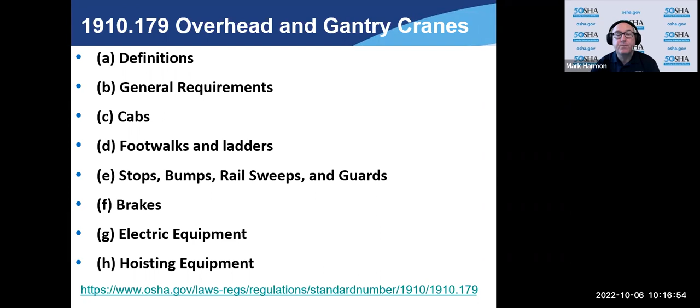What we will focus on today is going to be mostly from paragraph J, which is the inspection requirements. And again, as I said, when you have inspection requirements, that means that you are maintaining the equipment in a serviceable condition, right? We don't want to treat it like we would your car. I'll use that as my example. If you're just driving your car and waiting for it to break down, I can assure you it will break

down at some point. But with a piece of equipment, in this case, a crane, where you are lifting things, which can be several tons depending upon the size capacity of the crane, you want to maintain the integrity and the serviceability of the equipment. So with that, the OSHA requirements are spelled out in paragraph J that talks about inspections. Paragraph L talks about maintenance.

Again, maintenance would be what could be done in-house. Your maintenance technicians, if they have experience, knowledge, and are capable of providing maintenance to your crane, by all means, they can do that. Sometimes companies will go outside, right? Get a vendor, a third party to do crane maintenance for them. We'll talk about the differences of the two.

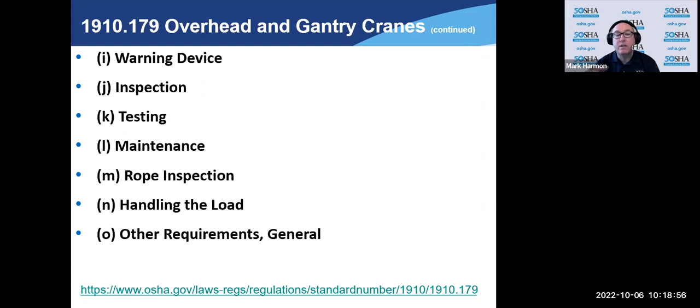The overhead crane is defined as a crane with a movable bridge carrying a movable or fixed hoisting mechanism and traveling on an overhead fixed runway structure. So again, when we say overhead crane, the pictures are depicting what we are talking about here. So if your company has a piece of equipment that would meet this definition, you could use it frequently. Could be something that you're using every day.

Some people that have a crane in their company, it may be something that's not used quite as often as you would imagine, but it is there and it is for use. So again, the requirement to maintain the equipment in a serviceable condition is important. We'll talk just briefly as we go through, what do I do if I have a crane? I'll give you an example. What if I have a crane at my company, but we only use it once a month?

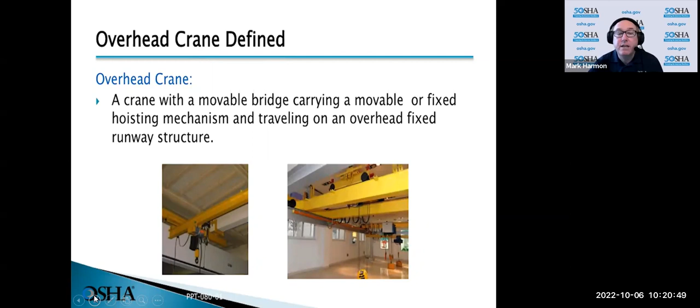Okay, sure. There's many companies that have a crane that isn't used every day. It's only used sporadically. The truck comes in, it's got, whatever, something on it that we can only unload with the crane. Again, you want to ensure the safety of your workforce. So if they're using the equipment, we need to make sure that we are complying with the inspection requirements, the maintenance requirements, so that the equipment works according to what it's expected to be able to perform as it was intended when it was manufactured. Let's go to the next slide.

Starting with an inspection. Believe it or not, the 179 standard talks about inspections. As I said, in that paragraph J, you should understand that there are certain requirements that have to be done, what we define as daily. So again, if you're using a crane, before you use it, you should go through an inspection process. Again, you will understand when I explain to you the various types of inspections. They're not all the same.

Some are limited. Some are quite comprehensive. But again, what we are wanting to ensure is that the equipment, the crane, is working as it should. So I always tell people, you can look at the OSHA standard. It does spell out in that paragraph J. If we had more time, I would pull that up on the screen. But paragraph J talks about, at a minimum, there should be two types of inspection categories. The first is a frequent, and the second is a periodic.

So let's start with the one here that we have on the screen, which is the pre-shift. Pre-shift means that before you use this equipment, you should be looking at it to make sure that it is working as it should. Some of the bullet points there are talking about the movements of the crane, whether it's the hoist, the trolley, or the bridge. The hoist is what's going to go up and down. The trolley is what is moving lateral. The bridge is what's moving through the shop area along the bridge beams.

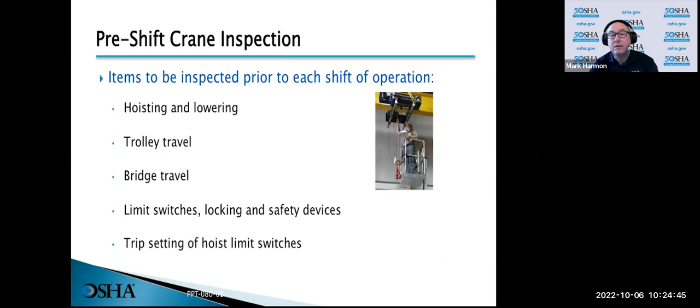Let's go to the next slide. So we talked a little bit about pre-shift. The visual inspection would include some points here that come from the OSHA standard. But another good resource for any piece of equipment is always the manufacturer. If you've got a crane, who built or manufactured this piece of equipment? Look for the maintenance manuals, look for the operations manual. They're going to have information specific to your piece of equipment, which is important because you're trying to maintain the equipment in a serviceable condition.

So just looking at some of the bullet points. You're looking for any missing parts, any parts that may be loose or not attached properly. Check the end stops, the buttons. Understand where the location for the disconnect switch is. Believe it or not, a disconnect, an electric switch on the wall. You should know where that is. It should be identified so that if you were in need of turning off the power to the crane, you would know how to do that.

Make sure that the wire rope is seated. Again, not getting too specific here, but the person doing the inspection should have an understanding of what the ropes are. The running rope, running meaning that it's moving, is what's going up and down with the hook.

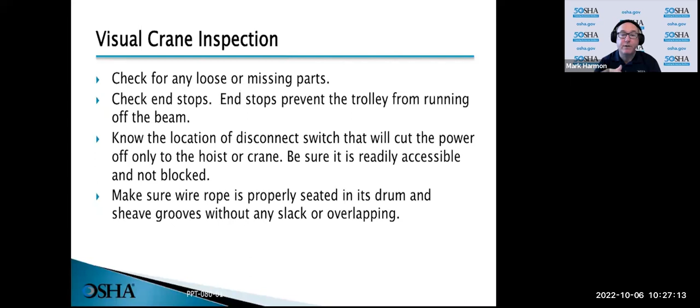So the frequent inspection, again, the OSHA standard, if you look in 179 under paragraph J, it does define frequent inspection. Remember I said there's two categories. Frequent is the first category. A frequent inspection has a window, and the window is from daily to monthly. So again, I want to understand if you're using your crane every day, there is a requirement that you inspect it every day, right, before use.

So the frequent inspection category is not as detailed as periodic, which we will see in a future slide. Periodic is a much larger, more comprehensive inspection. So the frequent inspection to me generally is done by the in-house employees. So the crane operator could be doing the frequent inspections, again, if they have that capability and understanding, or it could be the maintenance department. Again, you're looking at what would be needed to ensure that the equipment is serviceable, right? Is it working as it should?

So some of the things that you should be looking for are, again, adjustments of the mechanisms, deterioration or leaking, whether it's hydraulic or pneumatic parts, defects with the hook, which could include cracking, right? If you're really overloading the crane, which can happen, you can be causing the equipment to fail prematurely. So again, a frequent inspection is important. There should be a defined criteria of things that are looked at. Again, what I generally tell people is you should have some protocol to follow. There's a list in the OSHA standard under paragraph J of what that would include.

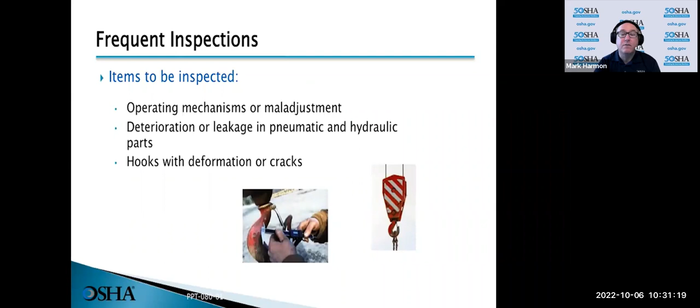Frequent inspections. Yeah, as I said, you're checking the hoist, the connections. You're looking for any distortion, any twisting. Again, if you were to approach the crane, just in a visual inspection, looking at the running rope, yeah, that's a wear item, right? You're gonna see that over time start to deteriorate. There's measurements that can be taken. Again, you are measuring the wear on the equipment, and like any piece of equipment, it will degrade based upon, right, severity of use.

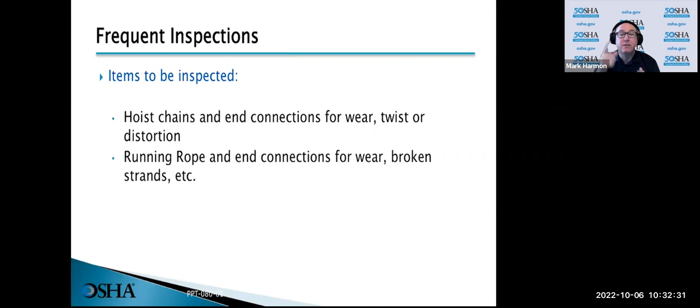Are you really working this crane to its limit? That would cause it to wear out faster as opposed to it sitting for long periods of time and not being used. So again, it is so important to inspect your equipment to keep it in that serviceable condition. I can't stress that enough. Let's go to the next slide.

Periodic inspections. Again, there are two categories: frequent and periodic. Periodic inspections, defined in the OSHA book, are from monthly to annually. And again, people always ask, well, wait a minute, you're telling me that it's not specific.

And I said, well, it doesn't say whether it has to be monthly or annually, but it says it must fall into that time frame. So as I said before, if you are using the equipment, the crane, in a very limited capacity, your periodic inspection could be on that much longer time frame. It could be an annual periodic inspection because you're thinking that this equipment is not being used as often, so it wouldn't be wearing itself out.

But if you have a crane that's being used 3 shifts every day, 6 days a week, round the clock, your periodic inspection, as we have described, is a much more thorough, much more comprehensive inspection than what would be considered your frequent inspection. Your periodic inspection is sometimes done by someone who is much more versed, whether experience, knowledge, capability in cranes themselves. Could be someone from the crane manufacturing company, could be a crane inspection company.

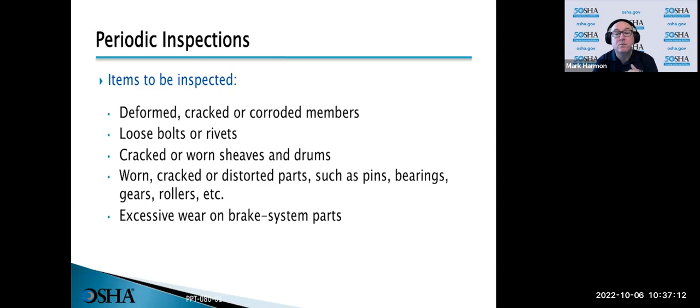Always important, look at the OSHA book, the standard, paragraph J talks about inspections, but also, as I've said before, the manufacturer of the equipment will give you a much more specific list of requirements for that piece of equipment. So let's go to the next one. This is another slide. As I said, the annual inspections for the periodic requirement shall be performed at a minimum once every 12 months, regardless of the severity of the crane usage.

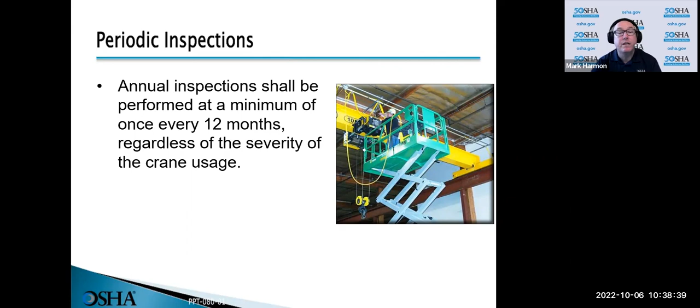And it's like any other piece of equipment. It will over time wear to the point where, okay, the serviceable life of this particular component, I believe, it needs to be replaced. Okay, then let's fix that. So you're wanting to maintain the serviceability of the equipment so as to not allow it to fail, break down before needing maintenance. Let's go to the next slide.

The written report. People ask this question, and it comes up quite often. If you look in the OSHA book, paragraph J, there is limited information about the written requirements, but I can assure you, you've got to have something in writing so as to demonstrate or prove that you have done this inspection.

Obviously, with the two different types, the frequent inspection could be smaller or less of a paperwork requirement. You could be signing off on an inspection card, whereas the one that was more comprehensive, the periodic, the one that can be done once a year, that's probably going to be a much larger report, right? Because again, you're going to look for deficiencies and damages, and you need to be writing up things

that, okay, we're going to repair the brakes because the brakes are worn beyond their limit. That needs to be described in the report, that yes, the brakes were switched out as part of the periodic inspection. They were deemed to be beyond serviceable limits. The written report should be kept on file. So again, if it's the OSHA compliance officer asking for it, it needs to be able to be produced.

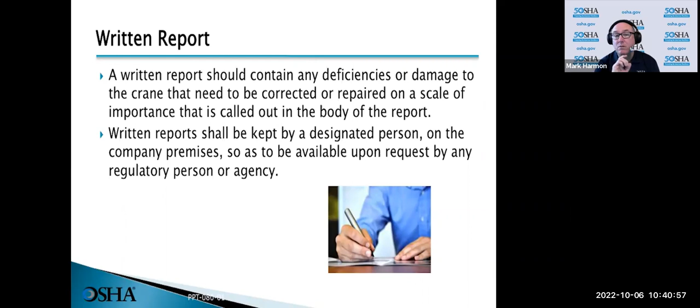Let's go to the next one. Maintenance. We've mentioned it a little bit. A preventative maintenance program based on the crane manufacturer's recommendations must be implemented. Any unsafe conditions that are detected during the required inspections must be corrected, right, prior to using the crane. It says only trained designated personnel shall perform the required maintenance and repair.

Again, today we're talking about cranes that are used in factories. There is no certification, I won't say, that's required in general industry. Once you get into construction crane operations, there's much more crane requirements, whether it's the crane operator, the maintenance, the upkeep, but that's not what we're talking about today. Today, we're talking about the factory, the general industry, the 1910.

If you read the OSHA standard, it talks about designated. So it does say that the employer must designate someone to operate the crane. So that means that they have to be trained on how to use it. Same as with the maintenance personnel, right? We want to make sure that people doing the maintenance have an understanding of what they're doing. So I wouldn't say just any mechanic can work on a crane. I would say they need to have knowledge, experience, some technical level of competency to perform that type of work.

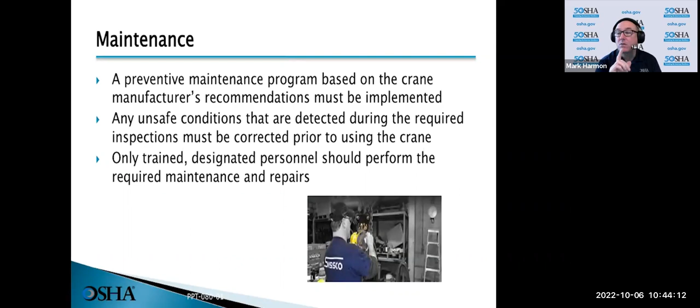Let's talk a little bit about moving the load. If you go into the OSHA standard, there is a paragraph in there that talks about movement using the crane. The first thing before you move it, you want to make sure that what you're hooking up to doesn't have any loose material, parts, the packing, right? So whatever you can do to ensure that it is going to be a clean lift, that would be helpful.

Make sure that there is no slack in any of the sling, the hoisting ropes, before the lift, and make sure that the lifting device is seated in the saddle of the hook. So if you think of a hook, you want to make sure that when you set that in there, it's at the bottom of it. You don't want it just hanging on the tip of the hook.

Again, there are things that you should learn or know in crane operator training to ensure that they're doing it so as to not create a greater hazard or get someone hurt. Let's go to the next slide.

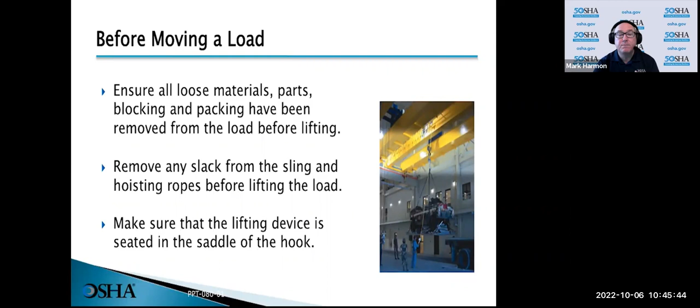Avoid swinging the load. Let's talk just briefly about this. And again, I always point to when you are using a crane and you're picking something up, it is important to make sure that you are centered directly above the load. We talk about don't side pull. And if you can see from the little illustration there, that means that you're hooking onto something, and instead of picking it up, you're actually side pulling it, you're dragging it.

Okay, that's really bad. Because if you understand what the crane is doing, just the way the crane is built, a crane is built to pick, to do this. It's picking up the load. A crane has little to no capacity to do this. It's not built in such a way as to side pull. And I'm sure that's written in the owner's manual. The manufacturer will tell you absolutely do not side pull, because the danger is that you're going to cause the crane to become unstable.

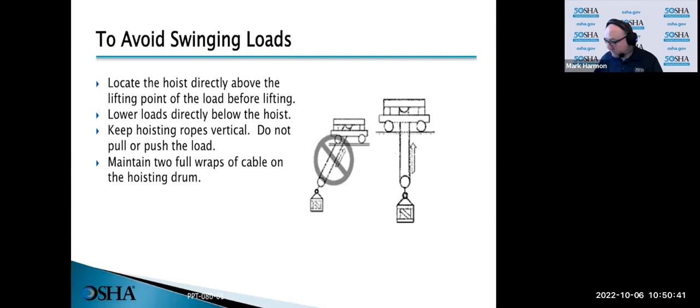Operations. Again, load should never be carried over personnel. That's sort of an understood rule. Because the fear, or what could be a problem, is if it falls, if it drops, if it plunges to the ground, you would never want someone under it.

It does talk about a warning signal or horn sounded when we come near personnel, right? So if you're moving the load, say through the shop area, make sure people are aware. Hey, we've got something that's coming through. Again, this could be a huge piece of whatever, 10 tons. Okay, you don't want to be anywhere near underneath that, because again, say the load shifts, the strap breaks, the wire rope fails.

So the operation, another bullet point says, the load should never be left suspended. That's another good rule to follow. So when we say suspended, meaning that it's off the ground and it's hanging there, and they went on break, they went to lunch. You should never leave the crane load suspended with nobody attending to it, because that's just unsafe. So you would bring it to the ground, so that would not be something that would cause a problem.

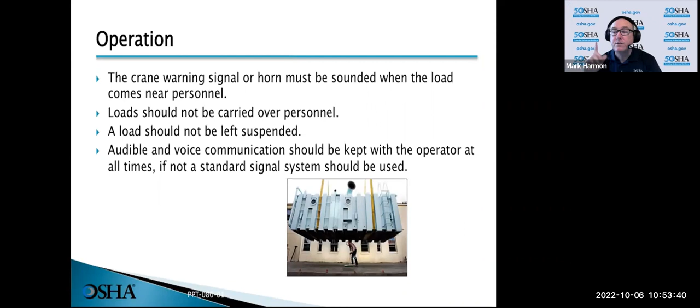The crane operator could be up in the cab, many feet in the air, whereas the person on the ground could be giving them hand signals. There are hand signals that are standardized, which should be understood by your crane operators. Let's go to the next slide.

Leaving an overhead crane. It talks about, again, back to what we talked about, the controls being unattended. That's always bad. It says if you do leave the controls, you should always lower the load. Familiarize yourself with the location of the disconnect. That would be in the case of an emergency. You would want to be able to turn the power off. Generally, what we see is the disconnect is usually within eyesight or in the same bay as where the crane is located.

But again, with electrical equipment like that, labels are very important. Crane disconnect. Make sure there's no clutter. Make sure that stuff is not set in front of it where you could not get to it if you need to. Let's go to the next one.

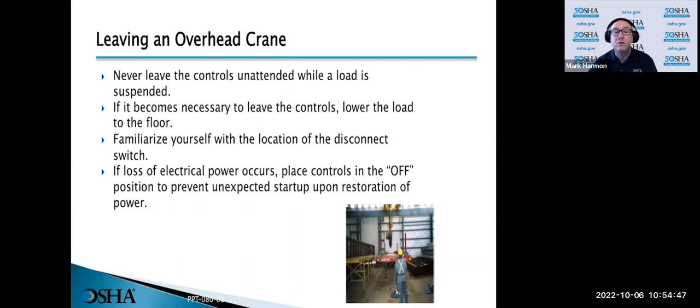Unsafe cranes. It does say, if you do find defects or deficiencies in your crane, take it out of service. The OSHA standard talks about taking a crane out of service. So disconnect the power, lock it out, so you're putting a lockout device on it, but it even goes so far as to say you should be labeling it. It says out of service or out of order, so that there would be no misunderstanding that this crane is not serviceable. Until we can get it fixed, it's out of service, don't use it.

I know we've had incidents where the first shift had a problem with the crane. They took it out of service, and for whatever reason that wasn't communicated. The second shift guys came in, they started using it. Next thing you know, bang, something breaks, somebody gets hurt. So unsafe overhead cranes, take them out of service, lock them out, label it, tag it, so as to understand this equipment is in need of repair. Let's go to the next slide.

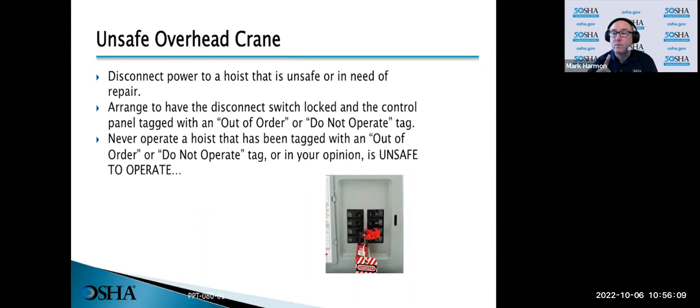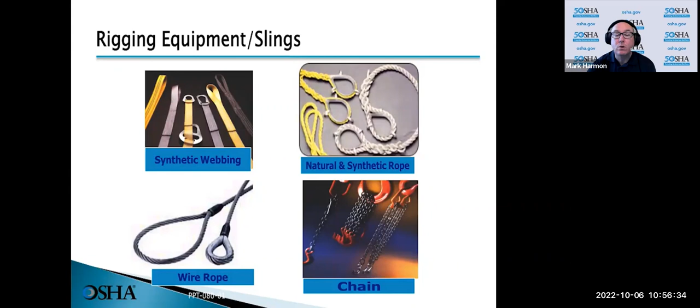Let's jump to, I'm looking at the time, rigging. Rigging is slings, chains, wire ropes. These are all the things that would be included in 1910.184. So there are several different varieties of these. Let's go to the next one.

Slings are commonly used with cranes, overhead lifting devices. The inspection requirements for slings are very specific. They're broken out by category, but as a rule, understand that all slings are to be inspected each day prior to their use. I've said that even with the cranes, same thing with the slings. It's a daily inspection. But if you have a sling that you're not using today, you're not inspecting it. It says inspected every day prior to use.

So anytime that you would use this equipment, yes, you must inspect it. And what are you looking for? Well, you're looking for defects, any type of issue that could cause this not to perform as it should.

Includes chains, ropes, slings, and again, they could be synthetic, they could be nylon, natural fiber. There's all kinds of varieties of slings out there.

The one that does go further than just the daily inspection, again, is a bullet point there at the bottom. It says chain slings must be inspected every 12 months. And that type of inspection is going to be much more thorough, right? Because you are going to make sure that this particular sling has not been compromised, or that it would presumably be able to last another 12 months before it is looked at again in a much more thorough way. But again, those are spelled out in 184, the sling standard. Let's go to the next slide.

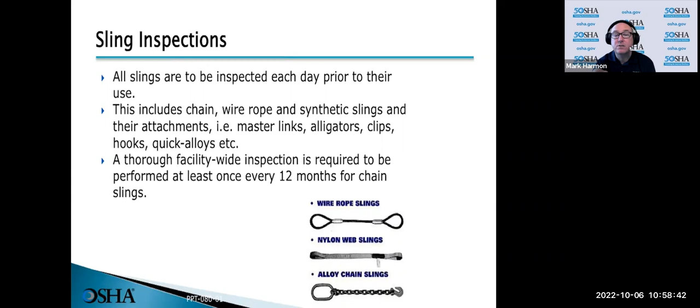The capacity, that's always a good one, because again, as a safety person, when you see someone using a sling, no matter what type it is, you want to know a few things like, okay, what is the capability or capacity of the sling? And it should be clearly marked. When it's new, I'll say the labels are generally easy to read, but over time through use and just wear and tear, sometimes the labels tend to become hard to read. You should always be able to read what the sling is, what its lifting capacity is, right? You can see a few examples there in the slide.

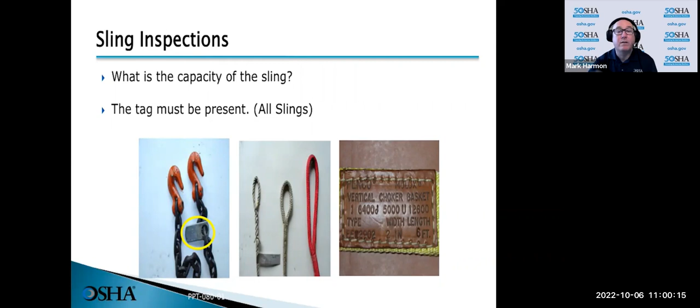And at any time, if you can't read that label, technically that sling should be taken out of service, because you can't say with some certainty what it is capable of performing. Does that make sense? So, if you've got a sling that's rated for 500 pounds, well, I need to be able to read that on the tag. I can't just assume that, okay, you're telling me this, but how do you know that? So you are looking for defects in the actual sling itself, but a label is something you should be aware of as well. Let's go to the next one. As you can see, I'm speeding up here a little bit, watching the time.

Some of the things to look for when you're doing your sling inspections, and again, in order to do those, you should be at least trained in what you're looking for. Companies that make slings have information that will give you what it is that you would not want to see. So on the one on the left there, it looks like it's a chain, but to me it looks like somebody tied it in a knot. Have you ever seen a sling that was tied in a knot? I can tell you right now that that is probably one of the worst things you can do, because it causes that particular point to lose almost more than half of what its lifting capacity is.

So same applies for a rope, for a nylon. If you're tying it in a knot, you just basically derated the lifting capacity of that sling. So that's what you don't want to see. Take that out of service. But you're looking for wears, cracks, knots, kinks, snags, tears. Think of those nylon slings. Those are very popular now. You always see a lot of nylon slings in the company. You're looking for those nylon slings, and when it mentions the word tears, yeah, there's a lot of nylon slings out there that have tears in them.

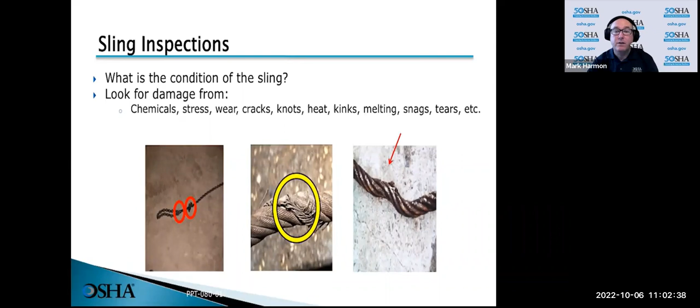And when they start showing that amount of deterioration, you're losing the load rating capacity. It's not going to be able to do what it's supposed to. So you need to be pulling those out of service, right? In most cases, things like that, you just discard them. You're throwing them out, cutting them up, so that somebody can't pull it out of the garbage can and reuse it. But the one in the middle shows the wire rope. Do you see how it's all deformed? The bird caging effect, right? Meaning that it was probably shock loaded. That's a bad thing as well. Let's go to the next one.

Contact your supervisor: can you get it repaired, or is it just a replacement item? But almost any company factory you walk through, I'm sure there's slings and lifting devices out there that have seen their life cycle long ago and they need to be pulled out of service. Let's go to the next one.

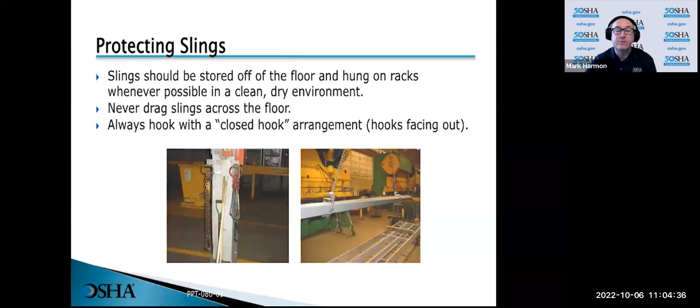Always hook with the closed hook arrangement. The picture on the right there shows how to pick something up, right? You want the hook so that it doesn't come loose. But again, slings, chains, chokers, these are all types of lifting devices. Let's go to the next one.

In the OSHA standard 184 under slings, it's broken out similar to most other OSHA standards, right? The ones we've been talking about here are the inspections under paragraph D. It uses language about looking for defects, kinks, tears, knots, things you don't want to see. But then it goes into specific types: alloy steel chains, wire ropes, metal mesh, natural fiber ropes, synthetics. They have specific categories and what you should be looking for

and used appropriately. In my experience, if you're working with something that's hot, you should think of that with your slings, because if your lifting sling is getting hot, that can compromise the load rating over time. I've seen people use ropes on something that was hot, and they were cooking the rope. It was almost melting, it was so brittle. In talking to them, I said, I think you need to reconsider what type of material you're using for your sling.

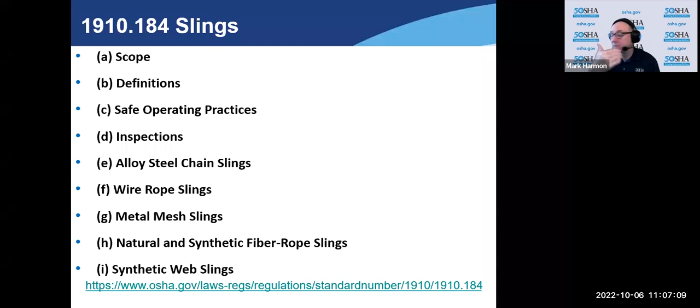Okay. If you've ever seen a sling fail, a crane fail, believe me, it's very dangerous. A lot of serious injuries can occur. So inspections are important with any of this. That's what we've been talking about now for an hour. Let's go to the next one.

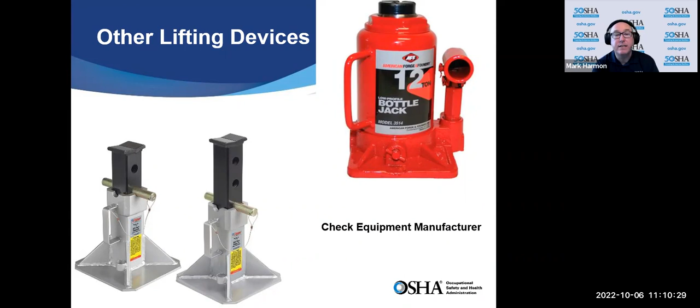I think the next one, again, just trying to throw stuff out. Auto lifts. And I only say this because recently we've seen an uptick, or I have, in people that have these that are maybe not car repair stations, but next thing you know, the maintenance department's got an auto lift, and we're going, oh, okay, you're using this to pick up company vehicles.

OSHA has found that companies, maybe because they're affordable now, buy these, and there's inspection requirements for this equipment. Again, treat it like you would any other lifting device, making sure that it is maintained in a serviceable condition. You don't want this to fall into that category of breakdown maintenance, right? Because a car is 2-3 tons, you got that thing in the air, and the mechanic is going to be underneath working.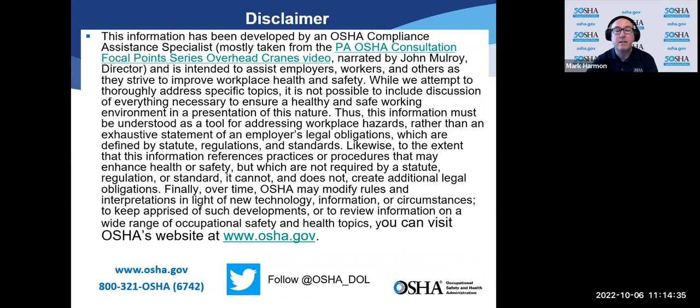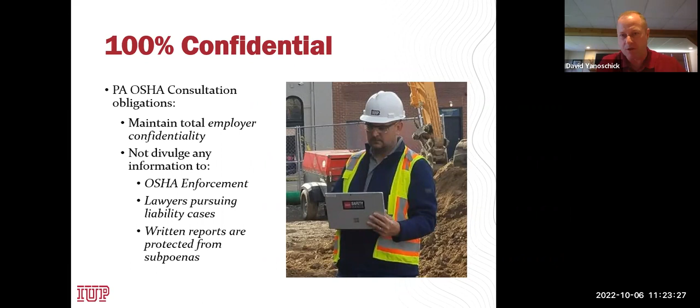Go ahead, Cindy. With OSHA consultation, unlike enforcement, which we're completely separate from, we issue no citations or penalties. So you can never have us come out to help you assess a hazard or a risk and then have that turn into an OSHA citation. While you're working with us, you're actually exempt from programmed OSHA inspections.

And as I mentioned earlier, we don't communicate with enforcement where we go and who we work with. So the only way they would know is if they came out to do a programmed inspection in your facility while you're actively working with us to assess some risks. We would give you documentation you could show them at that point to prove that you're working with us. And once again, during that time, you're protected from those programmed OSHA inspections.

As the employer, once again, you're actually in control of the scope of the visit. So you have to request our service. We're never just going to show up and say, hey, here we are. You have to request our service. And then once we do, you're in control of the scope of the visit as far as what we're there to look at.

Now, here's the catch. Because you're protected from OSHA inspections, before we start, you have to agree that you'll correct any imminent danger hazards or serious hazards. That's the catch. You have to request for us to come out. You control the scope, but within that scope, if we identify a serious hazard, you have to agree to correct that before we start.

And we work with the employer to set up a time frame to say, hey, once we determine what that hazard is going to be, what the recommendations are to correct, how long do you think it's going to take you to correct that? And we come up with a mutually agreed upon due date to have you correct that. And then all you have to do once you correct that hazard is provide us with documentation showing that hazard is corrected. We close the hazard, close your case, and move on.